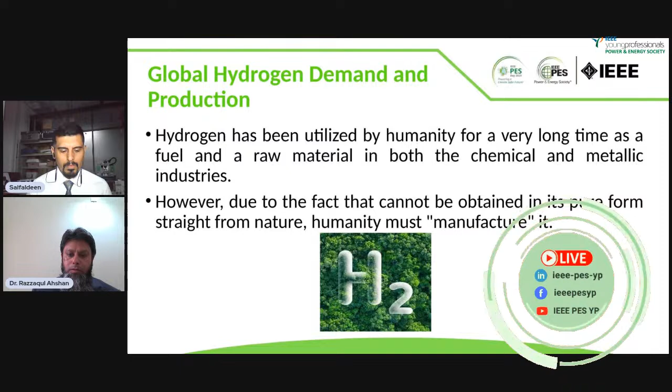If we look at the broad spectrum of hydrogen applications, the hydrogen demand can be seen across all sectors - for example, transportation, heat and power applications for buildings, heat and power for industry feedstock, mobility, and other applications. I will not go through all of these in detail; it's just to highlight how hydrogen demand can increase considering its massive applications around us.

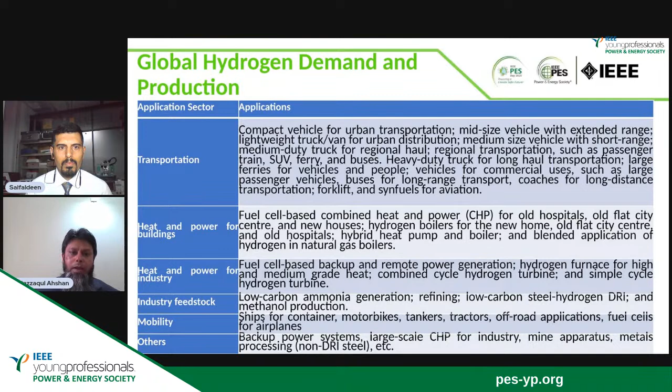If you look at the hydrogen demand in million metric tons, by 2018 it was almost 38 million metric tons for refining purposes, 31 million metric tons for ammonia, and other applications accounted for 4 million metric tons.

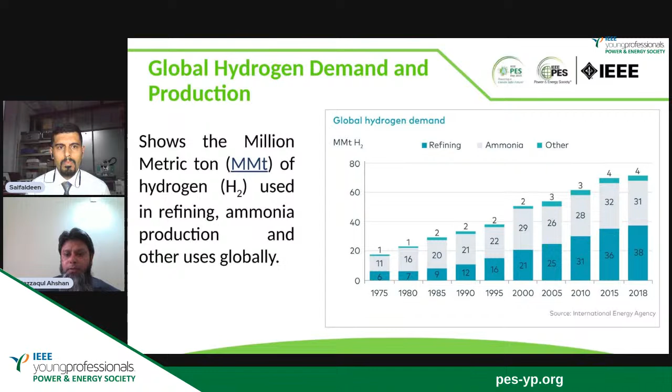So you can easily see that most hydrogen production comes from fossil fuel. By 2021, only 1% of global hydrogen came from renewable energy, which is basically nothing - we can say it's just the start of the green hydrogen journey.

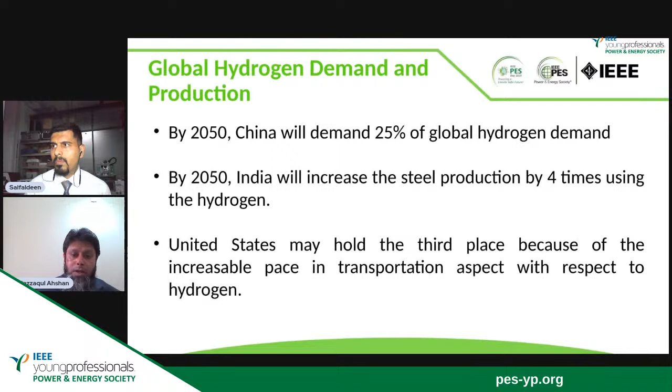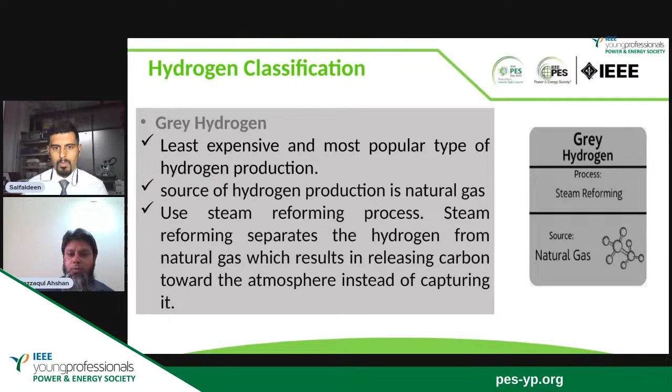First, gray hydrogen is basically coming from natural gas, and it's produced through the steam reforming process. This is the least expensive and most popular type of hydrogen production, with natural gas as the source. However, this produces greenhouse gases - we all know that, because there's no other technology in it, like CCUS. If you don't use it, all of the carbon dioxide produced will emit to the air.

The second one is called blue hydrogen. Blue hydrogen can also be called low carbon hydrogen, because although the source is natural gas, steam reforming happens with carbon capture. So whatever carbon comes out of the production process gets captured and stored. In the case of gray hydrogen, it was just emitted to the air. That's why blue hydrogen is getting popular, and can be considered a low carbon hydrogen. But it's not complete - the carbon dioxide cannot be completely eliminated. Even if you try to capture it, there might be some leakages, so there will be some carbon dioxide emission in this hydrogen production process.

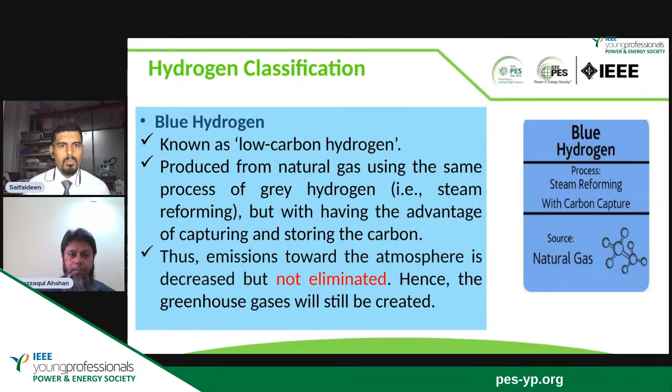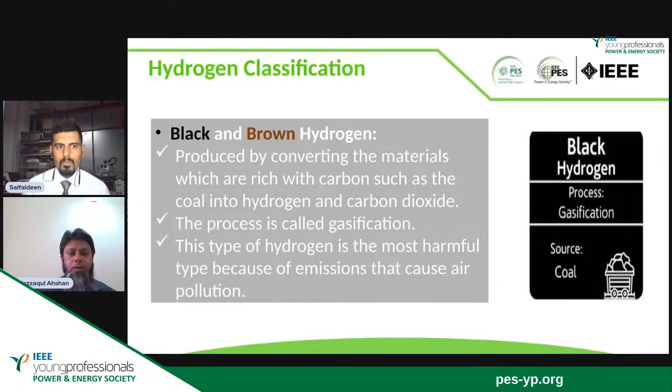Black and brown hydrogen comes from coal as the source, with the process being gasification. This is probably one of the worst, producing the most carbon dioxide. The coal material basically converts into hydrogen and carbon dioxide, through the gasification process. It's the most harmful type because the emissions cause air pollution.

The one coming from nuclear energy as the source follows the same procedure like electrolysis process. It's also called pink or purple or red hydrogen - the major energy here is basically coming from nuclear energy. And you all know that not every country has the capacity to develop or operate this type of energy resource, which limits this type of hydrogen production as well.

Turquoise type hydrogen is a new kind, also called low carbon hydrogen. The source is natural gas, again a fossil fuel, and a pyrolysis process is used. This process produces solid carbon and hydrogen, during which the chemical makeup is fractured using heat, creating solid carbon that does not emit any gaseous carbon. So the difference here is the carbon produced is solid, not gaseous, so it won't dissolve into the air. This is one of the good things.

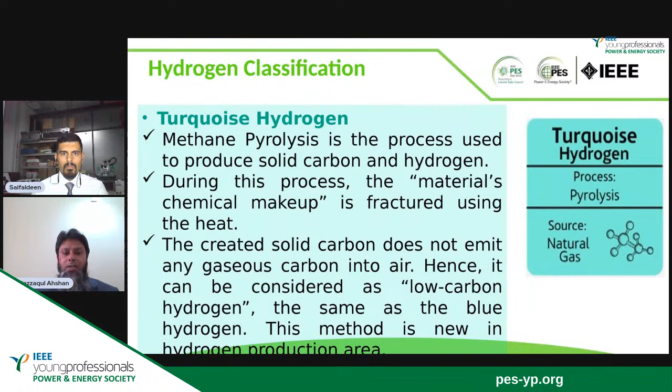That's why they say it's low carbon, and it has popularity and some future. However, the one we are basically targeting and interested in is green hydrogen, which comes from renewable sources and is done through the electrolysis process, either water electrolysis or solid oxide to water electrolysis.

There are different types of technologies that can be explored. The very common one is alkaline type water electrolysis. Mostly the energy needed by the electrolyzer comes from renewable sources, either wind, solar, or other renewable sources. So these are the different types of hydrogen, but mostly in the market you will find gray hydrogen or blue hydrogen. Renewable hydrogen, the green hydrogen coming from renewables, is the future that can have no emission at all.

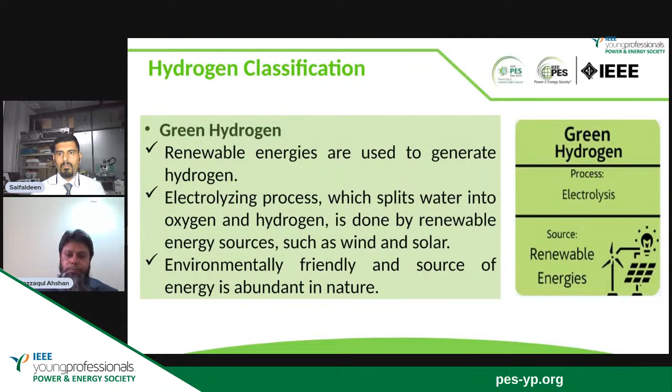So, green hydrogen production process. If we look at green hydrogen, you'll notice we are narrowing down to green hydrogen. I'll only be talking about this electrolysis process using renewable sources. I will briefly touch on two processes. Water electrolysis is one of them. Here, you have renewable energy coming from photovoltaic panels, or maybe wind turbines, or hydropower, and this power can be considered an input to the water electrolysis system.

These water electrolysis systems, there are 4 technologies that can be used: solid oxide water electrolysis, alkaline-based water electrolysis, proton exchange membrane (PEM) water electrolysis, and anion exchange membrane water electrolysis. Out of these 4, the most popular one is PEM type. Alkaline is low cost, but has some other limitations. The water electrolysis using PEM is the most popular one. The other two, solid oxide and anion exchange membrane, are still in the development stage.

The produced hydrogen will be stored as green hydrogen. The hydrogen produced can be stored, or we can convert it to electrical energy if needed using a fuel cell, or we can use this hydrogen for transportation to send to the load center, especially where needed, or we can store it for further use.

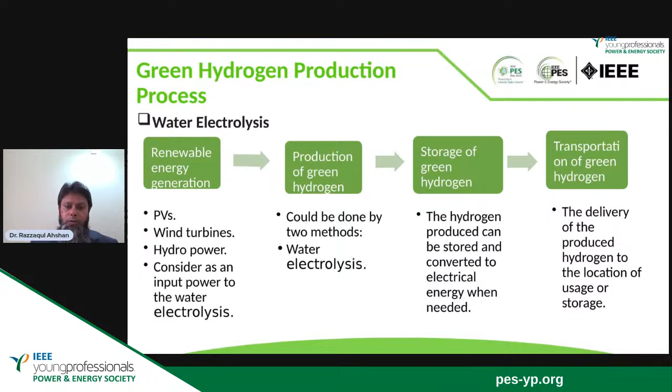So, in the water electrolysis process, the energy comes from renewable sources like solar and wind or other sources like geothermal. These pass as input to the alkaline water electrolysis system, which produces hydrogen and oxygen. Hydrogen is useful, as we understand. Oxygen coming from here is also a good byproduct, which can be stored and used for purposes where oxygen is needed. So it has 100% benefit — we can capture both hydrogen and oxygen here.

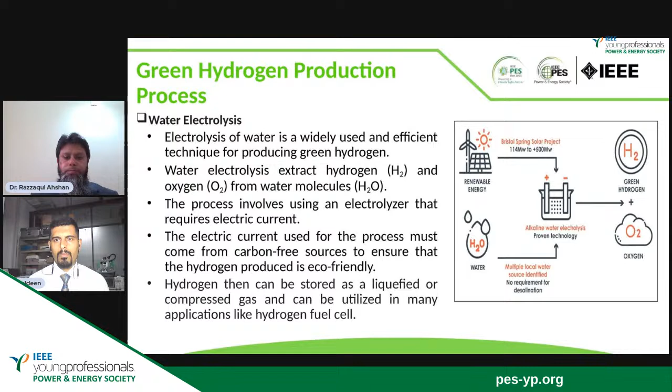Biomass or biomass gasification, or pyrogasification, is another process of producing green hydrogen. This gasification is not a new technology, but it can be explored and looked into through techno-economic analysis and feasibility analysis for countries where these types of sources are available.

Biomass or pyrogasification is basically an old technology. However, it depends on the country because it needs resources like wood, biomass, crop residue, non-recyclable plastic, old tires, and others — basically coming from waste. If you have enough waste, you can use that as a feedstock. This waste is heated at a very high temperature, 900 to 1200 degrees Celsius, in the presence of a small amount of oxygen. From there, you do the gasification and get complex gas containing hydrogen from organic matters like wood, biomass, crops, and residue. This is another process that can be used for green hydrogen production.

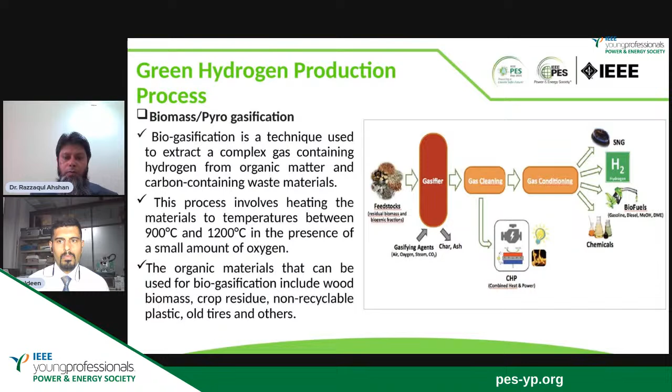However, for green hydrogen production, I think wind and solar are more convenient. The technology is more matured and can be much better than probably this gasification process and so on.

So now, how can this green hydrogen be a catalyst to reach net zero emission? So what is basically net zero? Net zero emission basically refers to achieving an overall balance between greenhouse gas emissions produced and greenhouse gas emissions taken out.

Net zero doesn't mean that the emission will be zero. No, the emission will be balanced, meaning the amount of greenhouse gas emission you produce should at the same time be taken out from the atmosphere. So as long as they are balanced or equal, we can say net zero emission.

This net zero emission is targeted to be achieved by 2050, and many countries are targeting this. So again, net zero doesn't mean the emission will be zero, it's just a balance between whatever is emitted and whatever greenhouse gas can be taken out from the atmosphere.

As you can see here, renewable energy can be used for electricity production. This electricity will pass to the electrolyzer process or electrolyzer system that will produce hydrogen. This green hydrogen can be distributed and used for different applications - in industry, in home applications, for transportation. So that is the way to reach net zero emission as predicted.

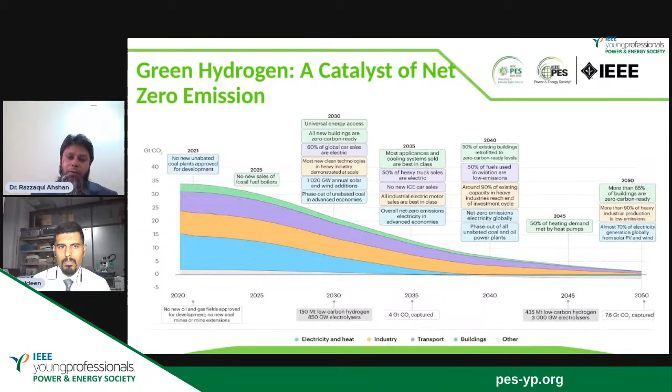So this is the target. If it goes smoothly towards this target, then it's easy to achieve zero emission. But we don't know - there are a lot of uncertainties and a lot of predictions here, so we have to wait and see.

So what to do to achieve this net zero is basically we need holistic and multidisciplinary involvement in clean energy innovation. It requires further rapid deployment of available technologies. Innovation opportunities should be looked into for advanced batteries, hydrogen electrolyzer, and carbon capture and storage. Hydrogen electrolyzer technology needs to be more efficient. Clean energy innovation must be accelerated with government incentives and R&D, and also demonstration and deployment at the core of energy and climate policy. So basically, it needs cooperation from researchers, policymakers, government, and all of this.

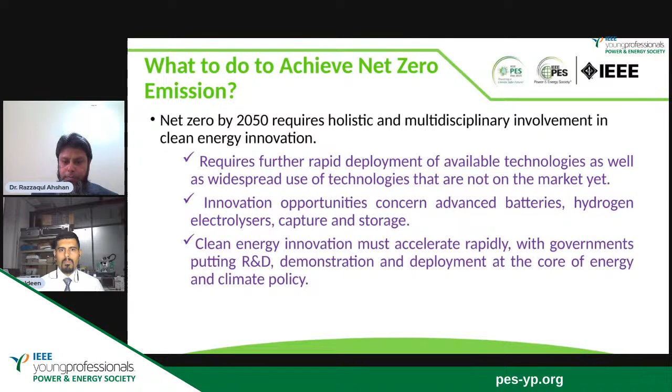I'll give you a brief overview of what the Sultanate of Oman is doing on hydrogen production and their net zero target. Hydrogen is mainly coming from natural gas in the Sultanate of Oman, and it is expected to grow hydrogen fuel cell vehicle deployment there. The country is really looking into hydrogen fuel cell vehicle deployment, and expects to produce 1 million tons of green hydrogen by 2030.

So this is one of the country's visions or plans - having no carbon emissions in 2050. By 2050, they are also trying to achieve net zero emissions. As a result, they have a target to include almost 40% renewable energy - 40% of their consumption should come from renewable sources by 2035. That's one of the ambitions they have.

Also with this, they have planned, starting 2028, to construct a green hydrogen plant with 25 gigawatts of solar and wind resources in one of the governorates in Oman. Full capacity operation will take place by 2038. This is probably going to be one of the biggest in the Middle East region, and the project will run in several stages.

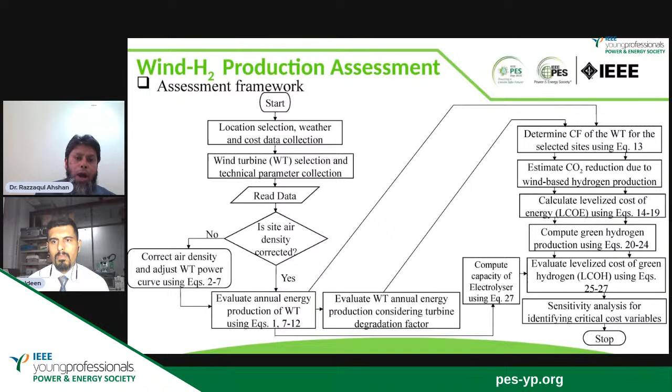After applying this framework, here are the results that I found. For example, I selected 18 sites. In these 18 sites, the meteorological data are available: wind speed at 10-meter height, surface roughness, average temperature, longitude, and latitude.

By screening the initial data, we found that some sites have very low wind speed, which doesn't fall into any class of wind turbine. So we identified that these sites are not suitable for installing wind turbines.

So what we did is exclude them and select 8 sites, which are listed here: Qairoon Hairiti, Thumrait, Masirah, Duqm, Ras Al Hadd, Sur, Sunaynah, and Qaran Alam. These 8 sites have good wind speed at 10-meter height.

Then we extrapolate this wind speed to 80-meter height, considering the turbine I selected here, Siemens SWT-113, 3.2 megawatt capacity, with a cut-in speed, as I said before, quite low at 2.5 meter per second, whereas cut-out speed is 22 meter per second.

In Oman especially, the wind speed hardly reaches 22 meter per second, maybe a few hours in a year. This is the rated wind speed, and hub height is 80 meters. So basically we plan to operate the wind turbine at 80-meter height, considering a lifetime of 25 years. This is the cut-in wind speed, meaning the wind speed above which the turbine will start to produce power.

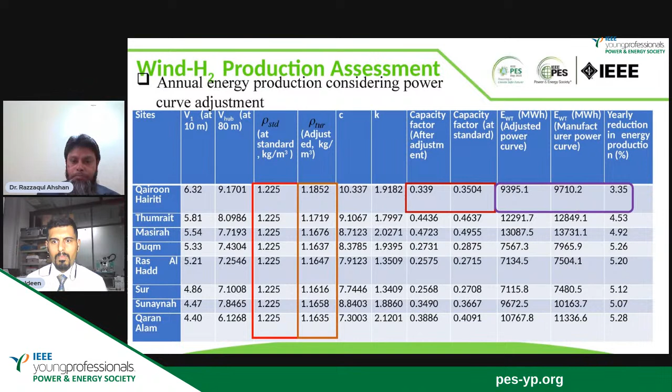This process is applied to all other sites, and you can see the data here. Now, after that, we found the energy produced using the adjusted power curve, considering the pressure and temperature from the sites, which gives us the adjusted air density. This makes the power curve adjusted from the one we got from the manufacturer.

Now, if we consider the degradation factor D equals 0.01, which is basically 1%, 2%, 3%, and so on. Considering 1% degradation at the end of 25 years, the energy production could be 8,280 megawatt hour, while at the first year it was 9,395. So the energy difference here is 11.85%, more or less the same for all sites.

So basically if we do not consider the degradation factor, we are still overestimating the energy production. If we overestimate the energy, what's the problem? The cost of energy we get will be lower, and that will not be accurate, and at the end the payback period and all this will be impacted.

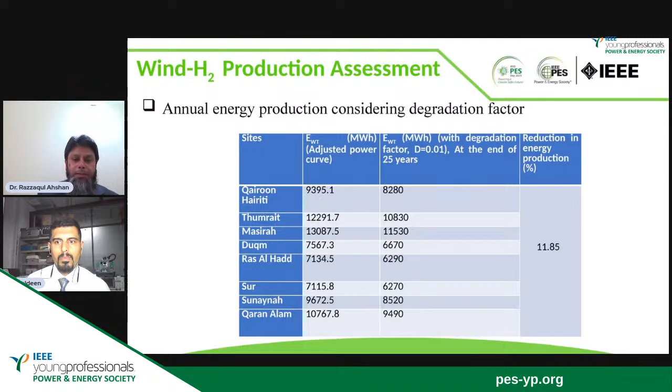So we found the levelized cost of energy for both cases, without performance reduction and with performance reduction. Without performance reduction means we didn't consider the air density correction, we didn't consider the degradation. The other one considered both.

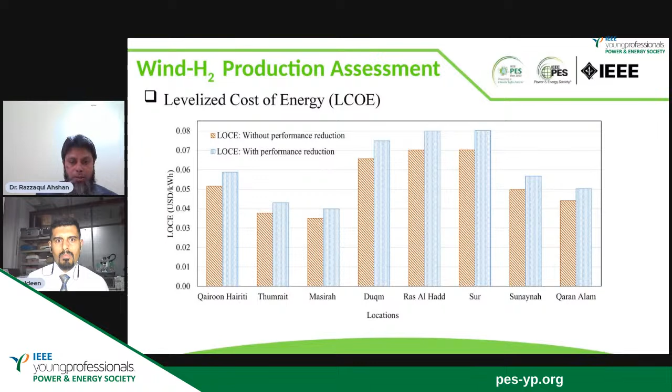So we basically look at how much carbon dioxide emission it can neutralize or reduce, based on how much energy is produced. We consider two cases for the emission: case one is emission equivalent to natural gas, and the second is equivalent to oil based generation. So based on two different systems, you have different emissions.

So this is the amount of carbon dioxide emission that can be reduced. If we have only a 3.2 megawatt wind turbine, this much carbon dioxide emission can be reduced depending on whether you're considering natural gas based or oil based generation. In Oman, it's mostly natural gas based, so we can expect this much ton of carbon dioxide emission reduction per year.

So now when we are talking about 25 gigawatt of renewable power generation, you can imagine how much carbon dioxide emission can be taken out from the air. So it will be a great impact on net zero emission.

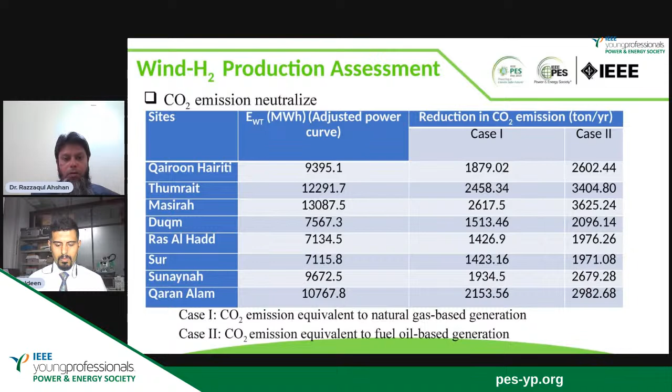So based on our analysis, we saw how much hydrogen production will be happening in each site. Of these 8 sites, the highest amount of hydrogen production is happening in Masirah Island. This is the annual hydrogen production in kilogram, and this is in another unit, normal cubic meter. It's very frequent in the literature to consider annual hydrogen production in terms of kg, so that's why both units are considered here.

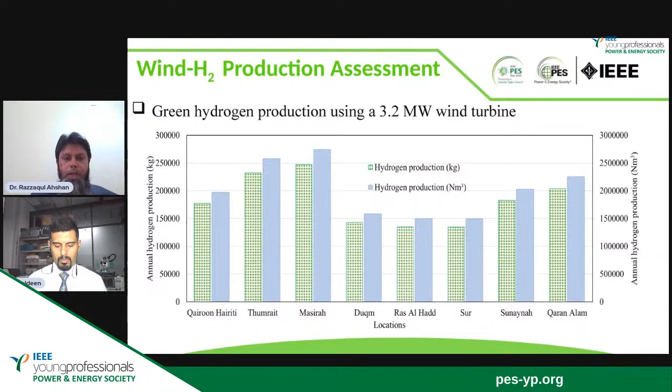One thing you can see is that Qairoon Hairiti has the higher wind speed, however Masirah has the lower wind speed. Although it has lower wind speed, it is actually producing more green hydrogen compared to Qairoon Hairiti. The reason is that Masirah has more consistent wind compared to Qairoon Hairiti.

The other thing is that Masirah is ranked 1, however Duqm is ranked 6. Although Duqm is ranked 6, it has more potential compared to Masirah if we consider hydrogen transportation and storage, since Masirah is an island with no port, and transportation will add more cost. But Duqm has a lot of space, the port is there, it's a kind of economic zone, so it will have production and consumption in place. So Duqm could be another good choice, or investors might choose Duqm.

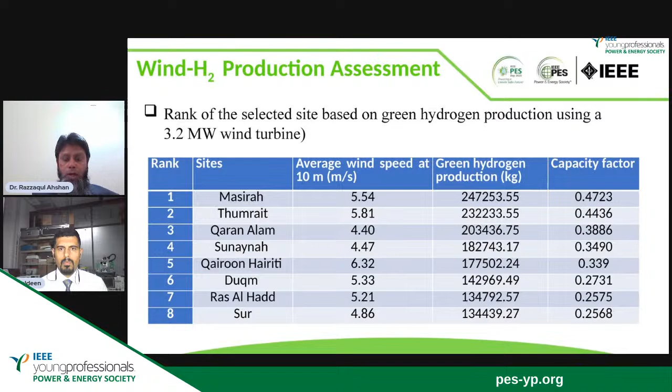So this part of the analysis, considering transportation cost, storage, and so on, the economic evaluation is not done. So this is a limitation of this work. This is a good area to still explore, which is basically part of the supply chain.

The levelized cost of hydrogen, as you can see, Masirah has the lowest hydrogen cost, 3.37, and among the others, the highest one is 6.13.

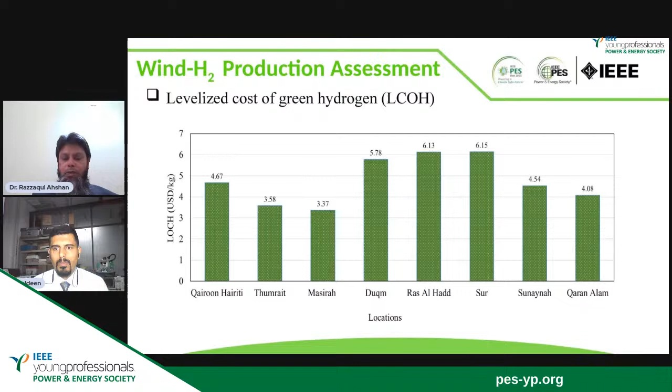So basically, the range is 3 to 6, as you had seen before. While I was presenting earlier the cost comparison, the renewable energy-based green hydrogen production cost is basically 3 to 8, depending upon the location. In Oman, it's from 3.37 to 6.15 with the technology cost considered in 2022 and before. But of course, if you consider now, maybe it will be reduced because of technology cost reduction and the degradation factor.

Now we also look at hydrogen production if we consider the degradation factor, the turbine degradation factor. In this case, we consider only Masirah Island because we found it's the best location. We look at how much hydrogen production was there: 247 tons per year without any degradation factor in the turbine, constant for 25 years. However, if we consider 1% degradation, hydrogen production gradually decreases over the 25 years, and with 2% it decreases even more, and 3% even more. So turbine degradation factor has an impact on hydrogen production, and also has an impact on carbon dioxide emission.

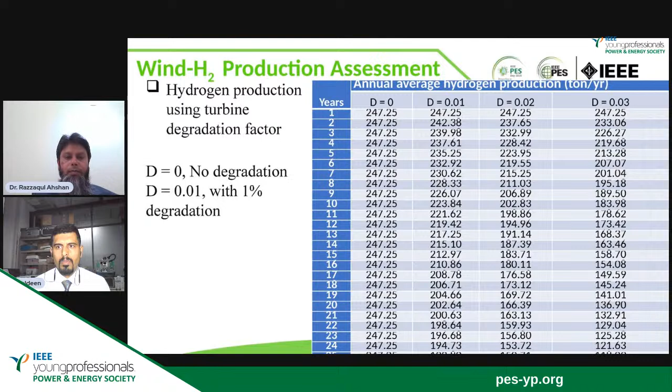What does electricity cost come from? This electricity cost depends on the renewable technologies. So further renewable energy technology cost reduction will reduce the cost of hydrogen production, and the utilization factor is also important. The higher the utilization factor, the more you can reduce the cost. This utilization factor basically depends on the size of the electrolyzer. That's why the size of the electrolyzer is an important aspect in this type of techno-economic analysis, or the design of a system that can produce green hydrogen.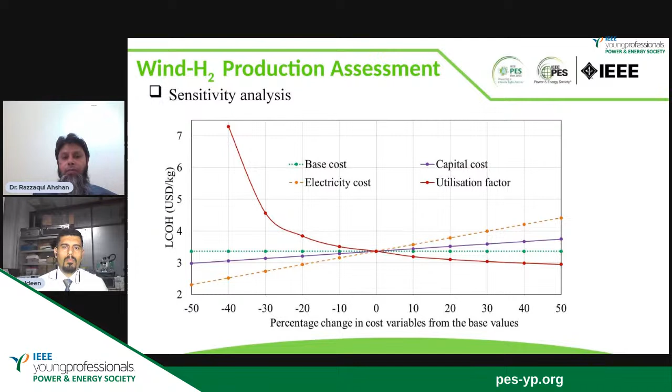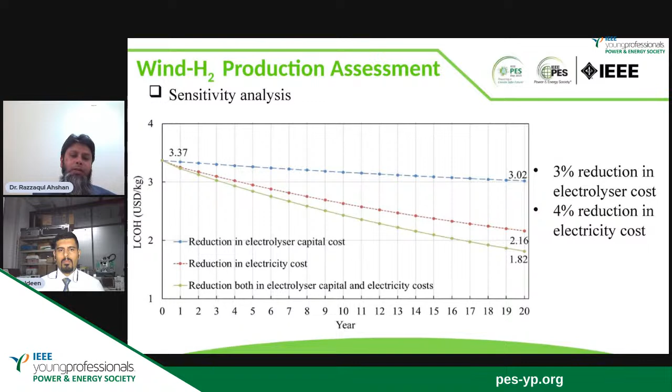Further, for a 20 year lifetime, we consider there will be a 3% reduction in electrolyzer cost and 4% reduction in electricity cost every year. If we consider this reduction individually, reduction in electrolyzer cost will reduce the cost maybe from 3.37 to 3 USD per kg, and the electricity cost reduction itself can reduce it from 3 to 2. But if you consider both cost reductions together, it can go up to 1.82 USD per kg of hydrogen production. Of course, this value depends on looking at the cost, and it will completely depend on the cost in the future. But it's expected that the cost will reduce, so we expect the green hydrogen production cost will also reduce.

So what are the challenges? There are some challenges I already discussed, which have been put in here. Basically, the electrical energy cost and the capital cost of electrolyzer are the major influential parameters here. These costs depend on the cost of renewable energy technologies and the cost of electrolyzer. We know massive research is going on in electrolyzer technology. There are new electrolyzer systems still under development. If those come with higher efficiency and their limitations are rectified, then we can even get a lower cost of hydrogen. For further reduction in cost, it also requires government initiatives and funding.

We need to identify suitable sources and sites to develop green hydrogen production, because green hydrogen production also requires a lot of water, which is another issue. So a country or site that has a hard time getting clean water or even seawater may not be very suitable for this type of project. In Oman, yes, they have issues with clean or drinking water, but they are planning to use seawater. So optimal design for a green hydrogen production plant is critical to optimize the cost of green hydrogen. There are a lot of things that can be done through optimization. By the way, the framework that is developed here and presented is not done through optimization—it's just numerical analysis.

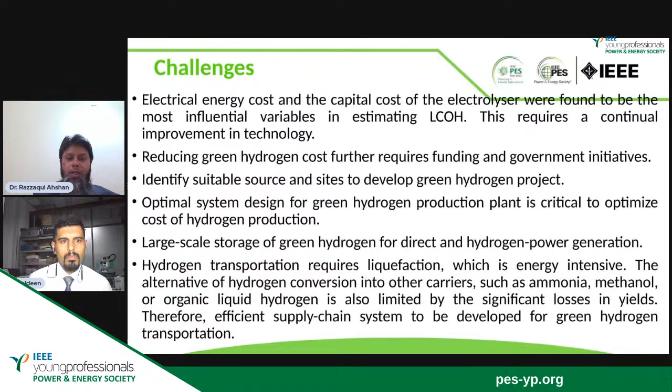Hydrogen transportation requires liquefaction, which is energy intensive. This is one issue. Alternatively, we have hydrogen conversion into other carriers like ammonia, methanol, and organic liquid, but this also has low efficiency, meaning significant losses can occur. Therefore, an efficient supply chain system needs to be developed for green hydrogen transportation. This is another big area that people, especially industrial engineering people, can explore.

So the takeaway here is that I tried to give you an overview so you recognize hydrogen demand and applications and its roadmap to achieving net zero by 2050. It shows how renewable energy is significant for producing green hydrogen, so deployment of renewable sources is essential. It also familiarizes you with initiatives and activities to deploy green hydrogen plants around the world, and explains source-driven hydrogen classification, giving you a clear idea of the different types of hydrogen available.

It allows you to identify subsystems of renewables to hydrogen production for a decarbonization future. You probably got some knowledge on a framework that performs techno-economic and environmental assessment of wind to hydrogen production. It also allows you to see the barriers and opportunities of deploying green hydrogen production.

Thank you, Dr. Ahshan. It's a very beneficial lecture, and you have given all of the information about green hydrogen. It's a very informative lecture. Thank you. Just I have one question.